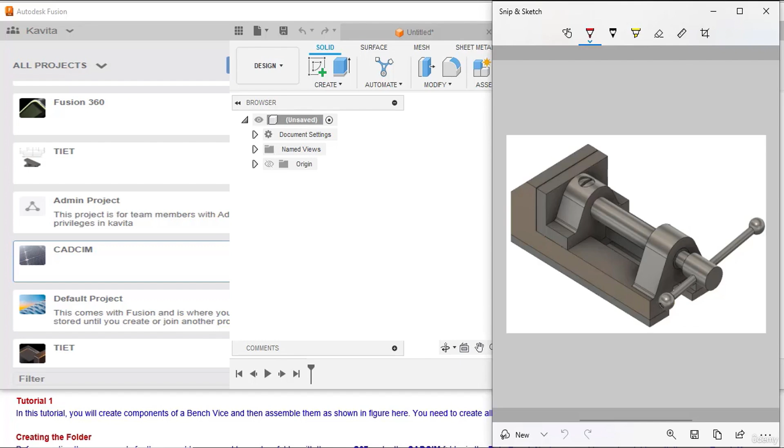Hello everyone, in this tutorial you will create components of a bench vise and then assemble them as shown in figure here. You need to create all the components as separate files.

Creating the folder. Before creating the components for the assembly, you need to create a folder with the name C07 under the CADCIM folder in the data panel. Next, you need to create a folder with the name bench vise assembly under the C07 folder.

Double click on CADCIM folder in the data panel and choose the new folder button. Double click here, then click on the new folder button. New folder is created here. Then press enter key.

Rename new folder to C07. Right click here. A shortcut menu is displayed here. Choose rename option from the shortcut menu and enter C07. Then press enter key.

Similarly, create a folder with the name bench vise assembly under C07 folder. Double click here and then click on new folder button and rename this folder as bench vise assembly. And press enter key.

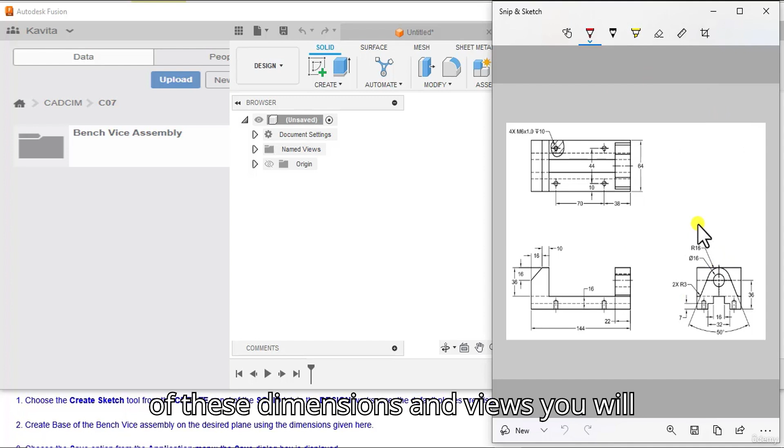Create base of the bench vise assembly on the desired plane using the dimensions given here. With the help of these dimensions and views, you will create the base of the bench vise assembly. But here you can see that I have already created base of the bench vise assembly by using the sketching and part modeling tools.

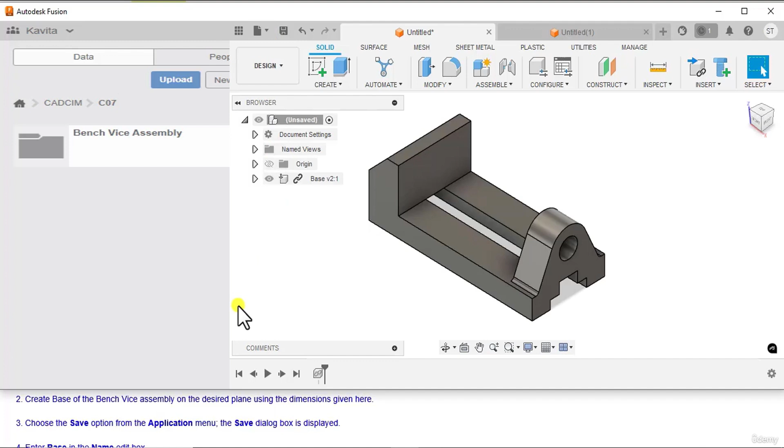Choose the Save option from the application menu. The Save dialog box is displayed. Click here, then choose Save option. Enter base in the name edit box.

Click on the down arrow on the extreme right side of the location selection box. The Save dialog box gets expanded. Click here. Choose the CADCIM option from the project area. Next, choose the bench vise assembly from the CADCIM C07 area.

Choose the CADCIM project from the project column. Now, choose bench vise assembly from CADCIM C07 area. Choose the Save button to save the model and exit the Save dialog box. Click on the Save button.

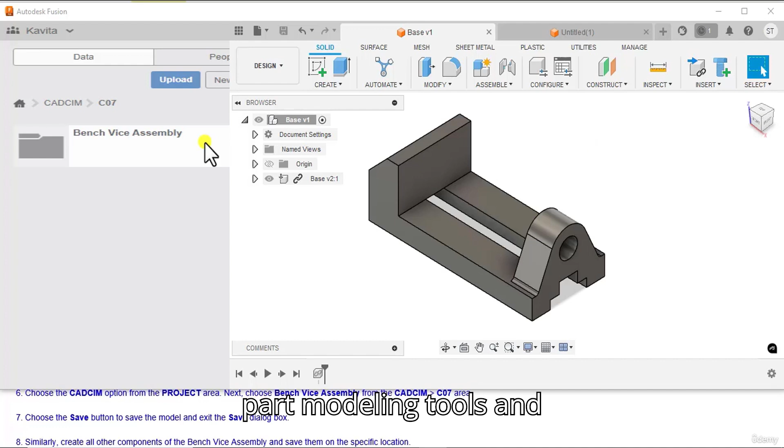Similarly, create all the components of the bench vise assembly and save them on specific location. You have to create all the components with the help of sketching and part modeling tools and save them in the bench vise assembly folder. Here you can see that I have created all the components with the help of sketching and part modeling tools and saved them in bench vise assembly folder.

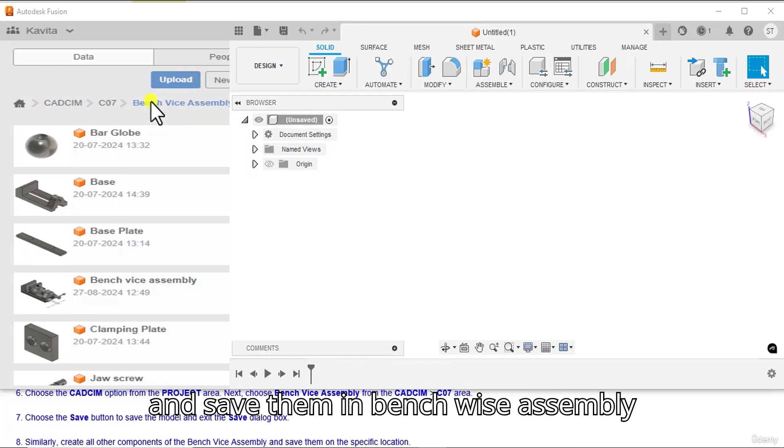Inserting components in assembly design. Choose the Show Data Panel button from the application bar if the data panel is not displayed by default. But here you can see that data panel is displayed by default, so you can skip this step. Double click on the bench vise assembly folder in the data panel. The bench vise assembly folder is opened. Double click on the bench vise assembly.

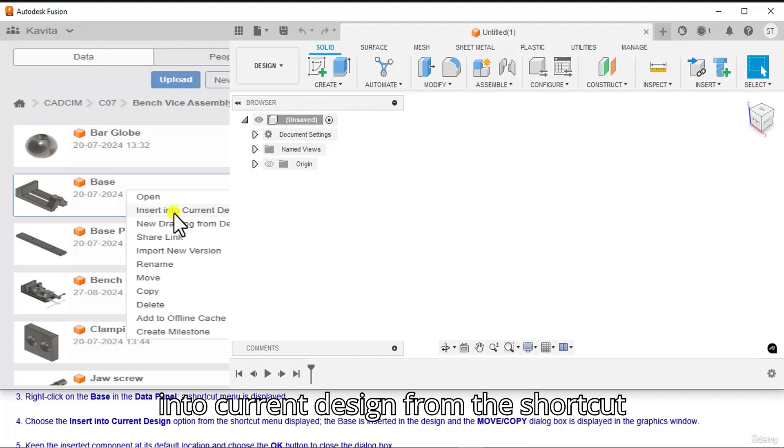Right click on the base in the data panel, a shortcut menu is displayed. Right click here. Choose the Insert into Current Design option from the shortcut menu displayed. The base is inserted in the design and the Move or Copy dialog box is displayed in the graphics window. Choose the Insert into Current Design from the shortcut menu. The base is inserted in the design and Move or Copy dialog box is displayed here.

Keep the inserted component at its default location and choose the OK button to close the dialog box. Click on the OK button.

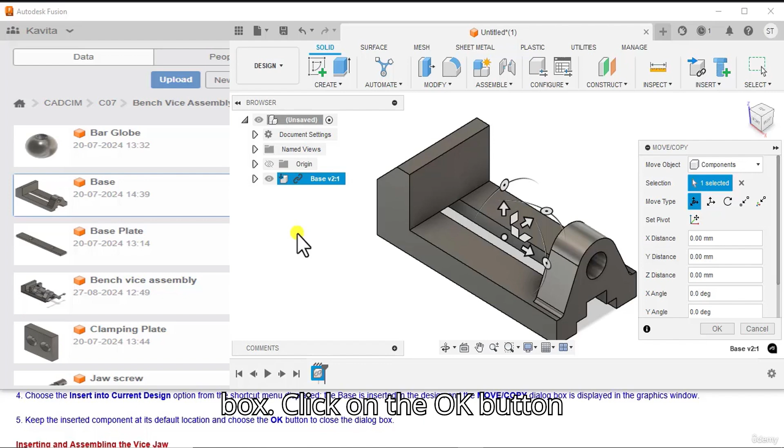Inserting and assembling the vise jaw. Next, you need to insert the vise jaw in the assembly design. Right click on the vise jaw in the data panel and choose the Insert into Current Design option from the shortcut menu displayed. The selected component is inserted in the assembly design and the Move or Copy dialog box is displayed along with the inserted component. Right click here, then choose Insert into Current Design option from the shortcut menu.

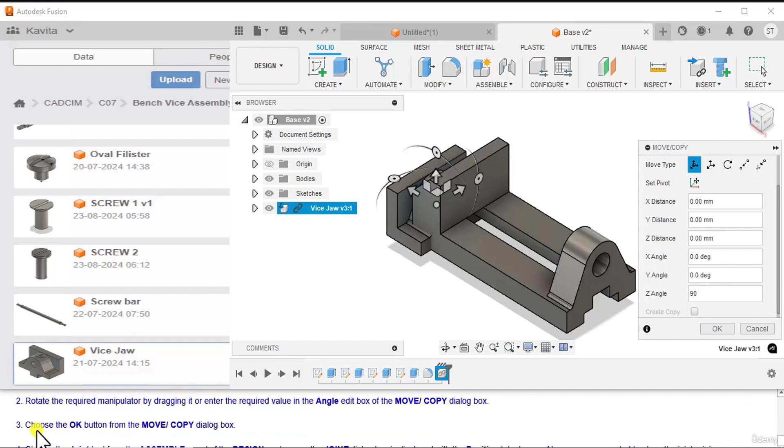Rotate the required manipulator by dragging it or enter the required value in the angle edit box of the Move or Copy dialog box. Enter 90 in the Z angle edit box. Choose the OK button from the Move or Copy dialog box. Click on the OK button.

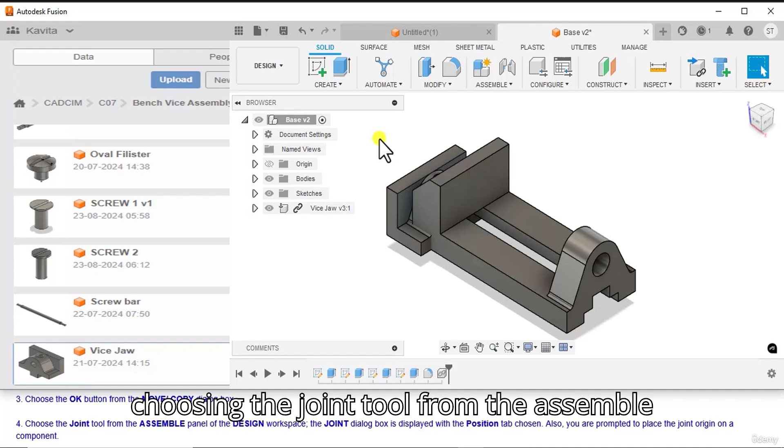Choose the Joint tool from the Assemble panel of the Design workspace. The Joint dialog box is displayed with the Position tab chosen. Also, you are prompted to place the joint origin on a component. Before choosing the Joint tool from the Assemble panel, you have to right click here, then choose the Unground from Parent option from the shortcut menu. Click here, then choose the Joint tool from the Assemble panel.

Choose the Simple button from the Origin Mode area under the Component 1 node. Choose the Simple button from the Origin Mode area. Next, select the location on the Vice Jaw where you want to place the joint origin. On doing so, the Select button gets activated in the Snap area under the Component 2 node. Rotate the assembly with the help of the ViewCube. Then select this face.

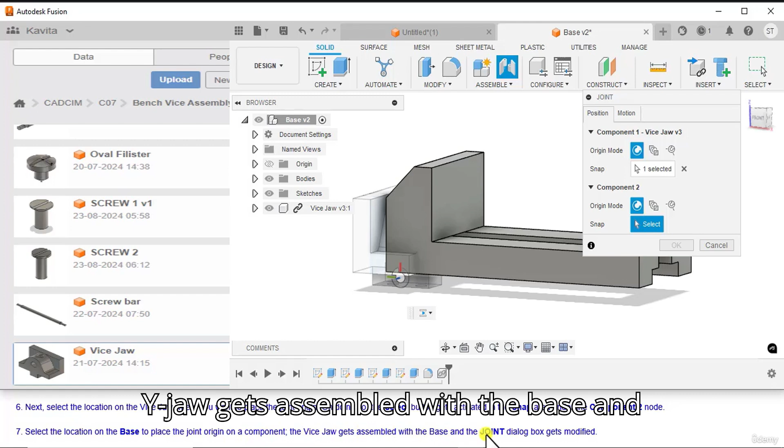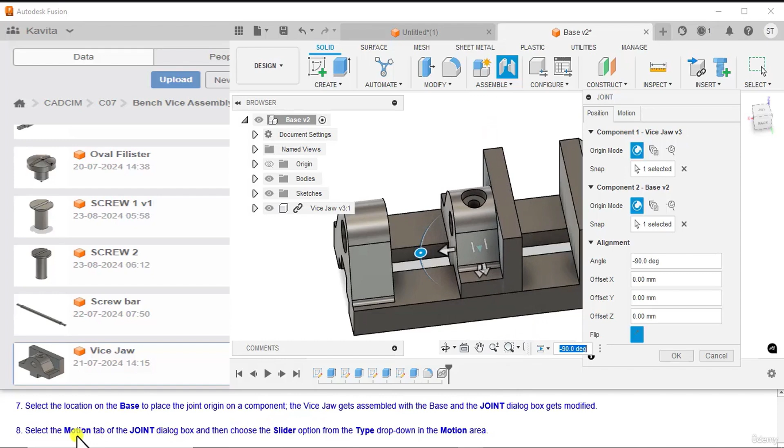Select the location on the base to place the joint origin on a component. The Vice Jaw gets assembled with the base and the Joint dialog box gets modified. Again, rotate the assembly with the help of the ViewCube and then click here. Select the Motion tab of the Joint dialog box and then choose the Slider option from the Type drop-down in the Motion area. Select the Motion tab and then choose the Slider option from the Type drop-down.

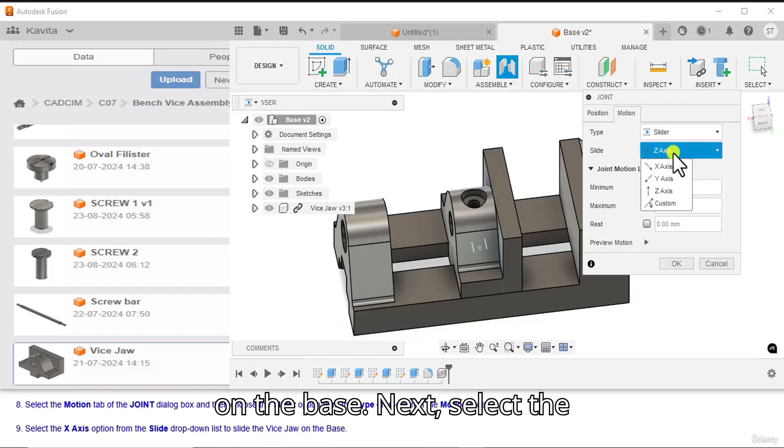Select the X-axis option from the Slide drop-down list to slide the Vice Jaw on the base. Next, select the X-axis option from the Slide drop-down list. Choose the OK button from this dialog box. Now click on the OK button. Click on the Home button to get the isometric view of the assembly. Now you can see that the Vice Jaw gets assembled with the base.

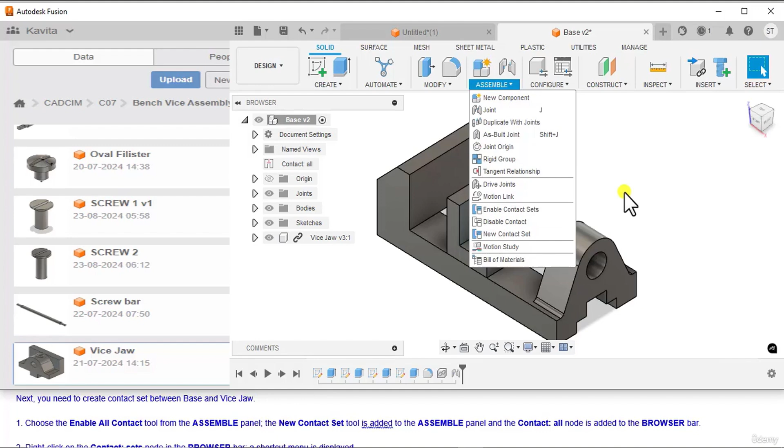Creating contact set. Next, you need to create a contact set between the base and the Vice Jaw. Choose the Enable All Contact tool from the Assemble panel. The new contact set tool is added to the Assemble panel and the Contact All node is added to the browser bar. Click here, then choose the Enable All Contact tool from the Assemble panel. A new contact set is added here and the Contact All node is added to the browser bar.

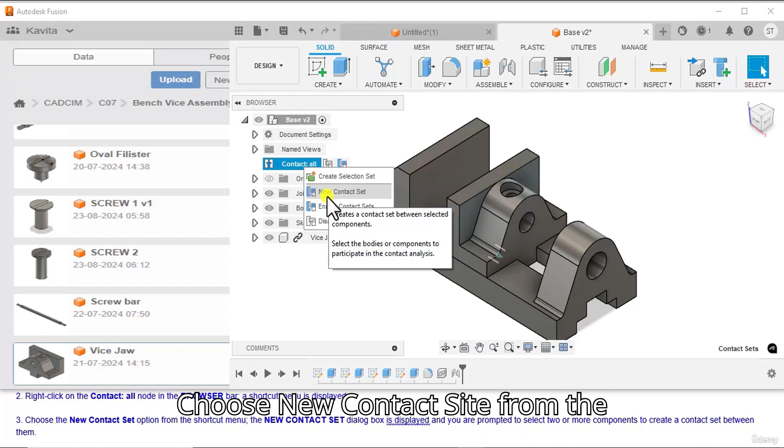Right click on the Contact All node in the browser bar. A shortcut menu is displayed. Right click here. Choose the New Contact Set option from the shortcut menu. The New Contact Set dialog box is displayed and you are prompted to select two or more components to create a contact set between them. Choose New Contact Set from the shortcut menu. The New Contact Set dialog box is displayed here.

Select base and vice jaw from the graphics window to create a contact between them. Choose base and vice jaw from the browser bar. Choose the OK button in the New Contact Set dialog box; the contact is applied between the components. Choose the OK button. The contact is applied between the selected components.

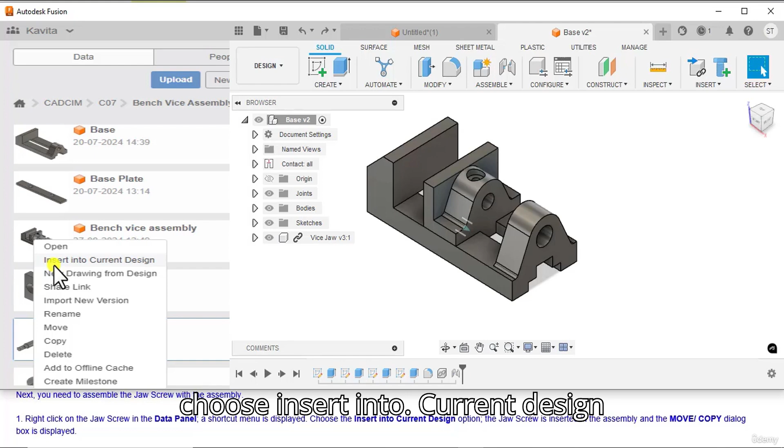Next, assembling the jaw screw. Next, you need to assemble the jaw screw with the assembly. Right click on the jaw screw in the data panel; a shortcut menu is displayed. Choose the Insert into Current Design option. The jaw screw is inserted in the assembly and the Move or Copy dialog box is displayed. Right click here. Then choose the Insert into Current Design option from the shortcut menu.

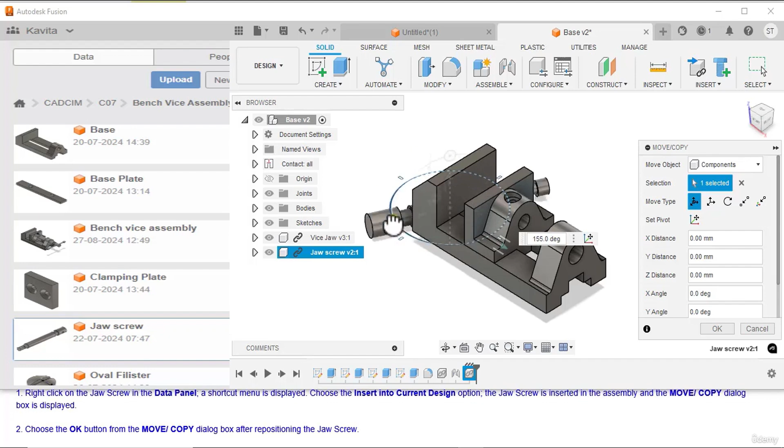Choose the OK button from the Move or Copy dialog box after repositioning the jaw screw. Reposition the jaw screw with the help of the manipulator. Then choose OK from the marking menu. Choose the Joint tool from the Assemble panel of the Design workspace. The Joint dialog box is displayed. Also, you are prompted to place the joint origin on a component. Click here, then choose the Joint tool from the Assemble panel.

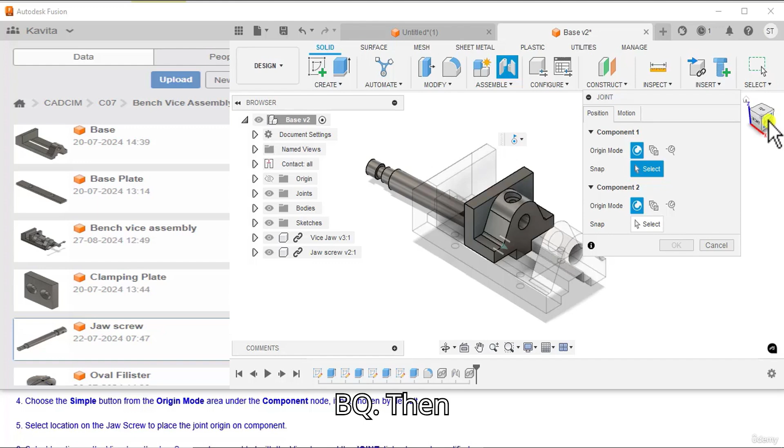Choose the Simple button from the Origin Mode area under the Component node if not chosen by default. Choose the Simple button from the Origin Mode area. Select a location on the jaw screw to place the joint origin on a component. Rotate the assembly with the help of the ViewCube. Then click here. Select a location on the vice jaw. The jaw screw gets assembled with the vice jaw and the Joint dialog box gets modified. Now click here.

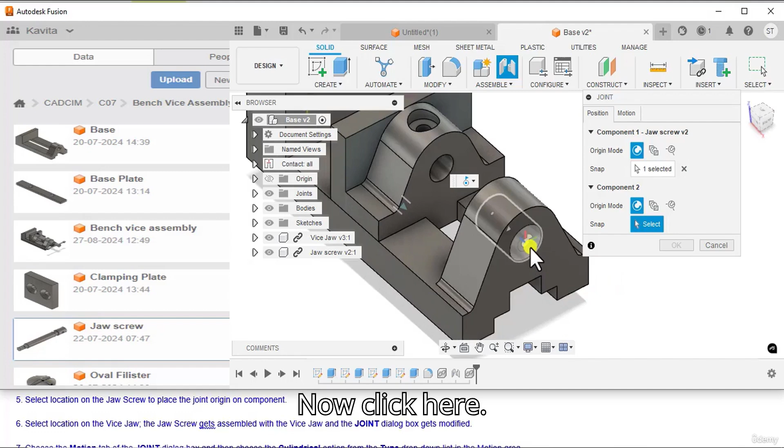Choose the Motion tab of the Joint dialog box and then choose the Cylindrical option from the Type drop-down list in the Motion area. Choose the Motion tab and then choose the Cylindrical option from the Type drop-down list.

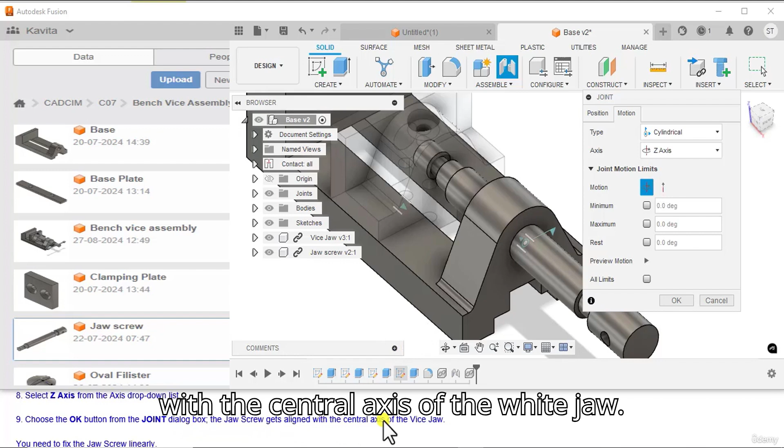Select Z-axis from the Axis drop-down list. Select the Z-axis from the Axis drop-down list. Choose the OK button from the Joint dialog box. The jaw screw gets aligned with the central axis of the vice jaw. Click on the OK button. Now you can see that jaw screw gets aligned with the central axis of the vice jaw.

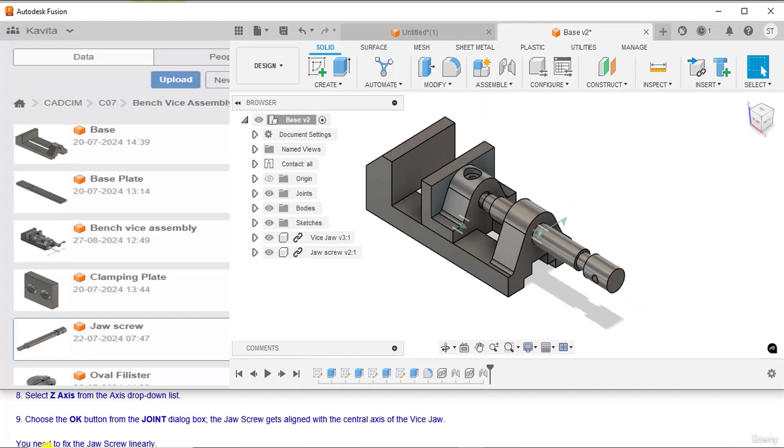Click on the Home button to get the isometric view of the assembly. You need to fix the jaw screw linearly. Invoke the Joint dialog box and choose the Simple button from the Origin Mode area. Next, select the face of the jaw screw. You are prompted to place a joint origin on the component.

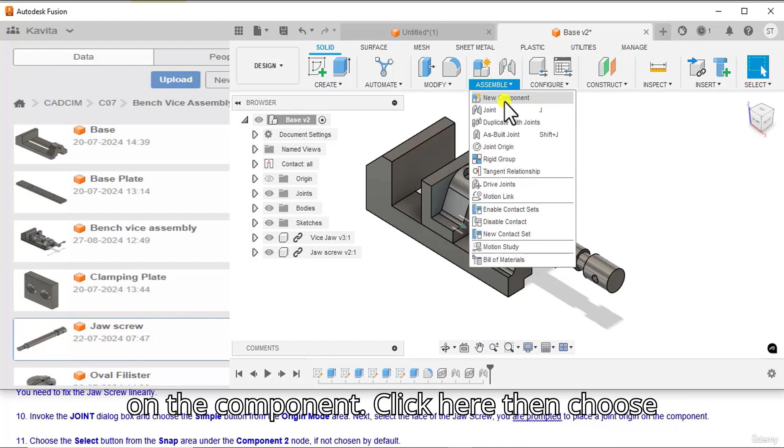Click here, then choose Joint option from the Assemble panel. Next, select Simple button from the Origin Mode area. Now rotate the assembly with the help of the ViewCube. Then click here. Choose the Select button from the Snap area under the Component 2 node if not chosen by default. Choose the Select button from the Snap area.

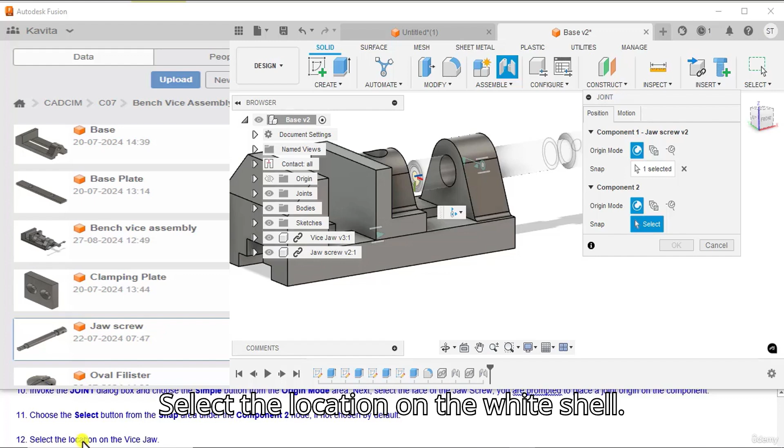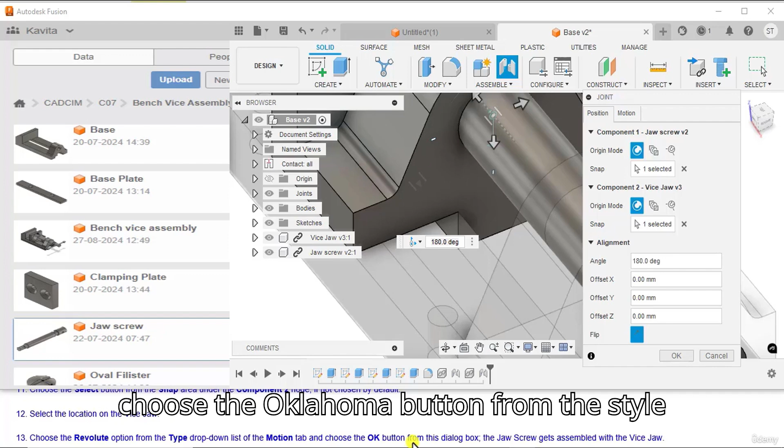Select the location on the vice jaw. Rotate the assembly with the help of the ViewCube and then click here. Choose the revolute option from the type drop-down list of the motion tab and choose the OK button from this dialog box. The jaw screw gets assembled with the vice jaw.

Click here, then choose revolute option from the type drop-down list. Now click on the OK button. Choose the home button from the graphics window. Now you can see that jaw screw gets assembled with the vice jaw.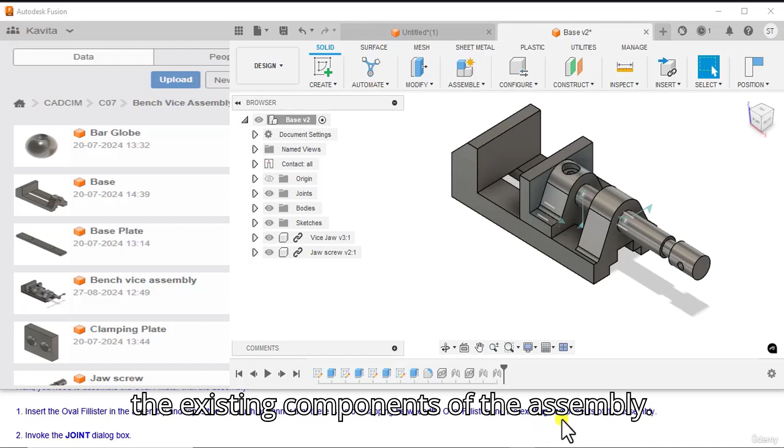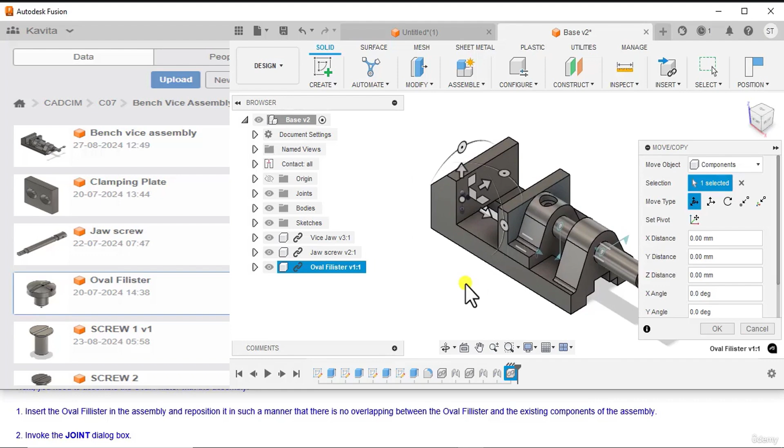Assembling the oval fillister. Next, you need to assemble the oval fillister with the assembly. Insert the oval fillister in the assembly and reposition it in such a manner that there is no overlapping between the oval fillister and the existing components of the assembly. Right click here, then choose Insert into Current Design from the shortcut menu displayed. Drag the oval fillister with the help of manipulator. Then choose OK button from the Move or Copy dialog box.

Invoke the Joint dialog box. Click here, then choose Joint tool from the Assemble panel. Select the edge of the oval fillister as component 1 and the inner edge of the vice jaw as component 2. Rotate the assembly with the help of ViewCube. Then select this edge of oval fillister. Again click on the home button to get the isometric view of the assembly. Now select this edge of vice jaw.

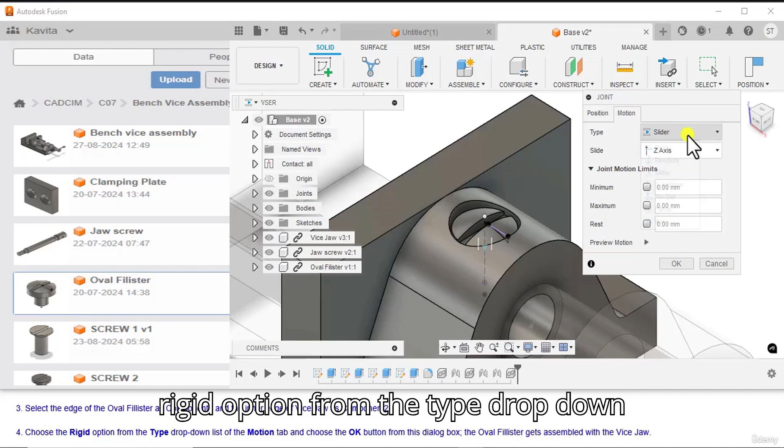Choose the rigid option from the type drop-down list of the motion tab and choose the OK button from the dialog box. The oval fillister gets assembled with the vice jaw. Click here and then choose rigid option from the type drop-down list. Now choose the OK button. The oval fillister gets assembled with the vice jaw.

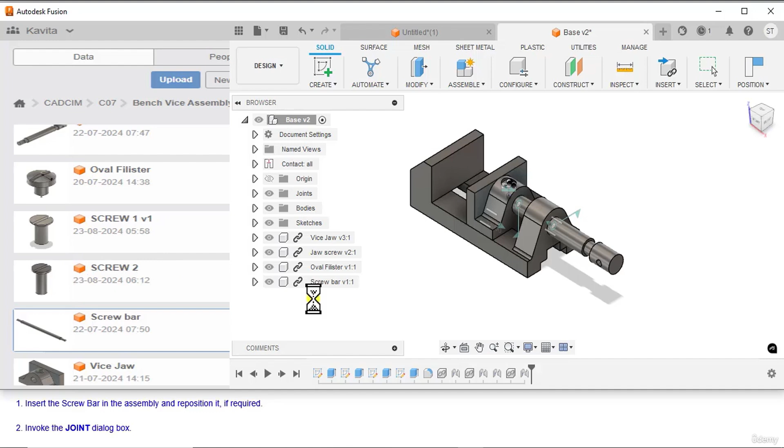Assembling the screw bar and bar globes. Insert the screw bar in the assembly and reposition it if required. Right click here, then choose Insert into Current Design option from the shortcut menu displayed. Reposition the screw bar with the help of manipulator. Now choose the OK button from the Move or Copy dialog box.

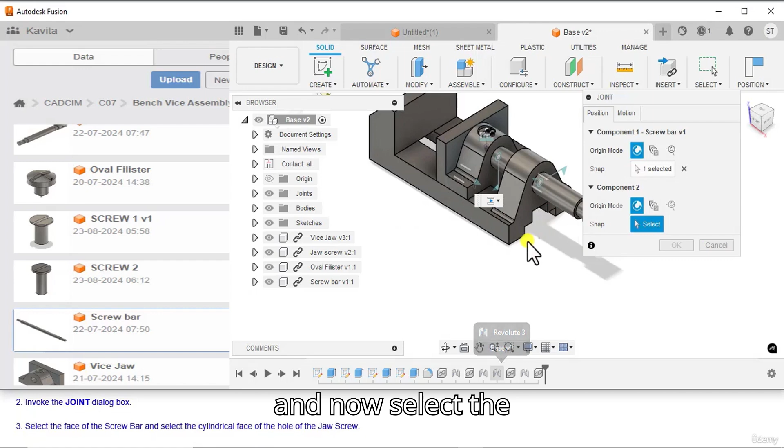Invoke the Joint dialog box. Click here, then choose Joint tool from the Assemble panel. Select the face of the screw bar and select the cylindrical face of the hole of the jaw screw. Select the face of the screw bar and now select the cylindrical face of the hole of jaw screw. Choose the slider option from the type drop-down list of the motion tab. Click on the motion tab and then make sure that slider option is selected in the type drop-down list.

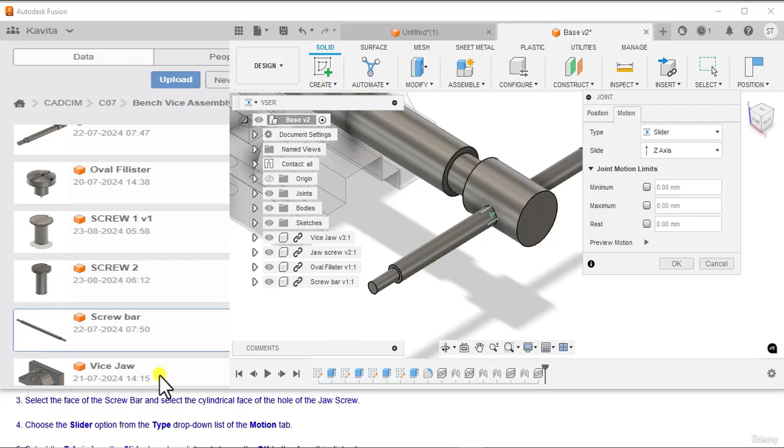Select the Z axis from the slide drop-down list and choose the OK button from this dialog box. Make sure that Z axis is selected in the slide drop-down list. Now click on the OK button.

Insert two instances of bar globes in the assembly design from the data panel and reposition them so that their planar surface is toward the screw bar where it will be assembled. Right click here, then choose Insert into Current Design. Now reposition it with the help of manipulator.

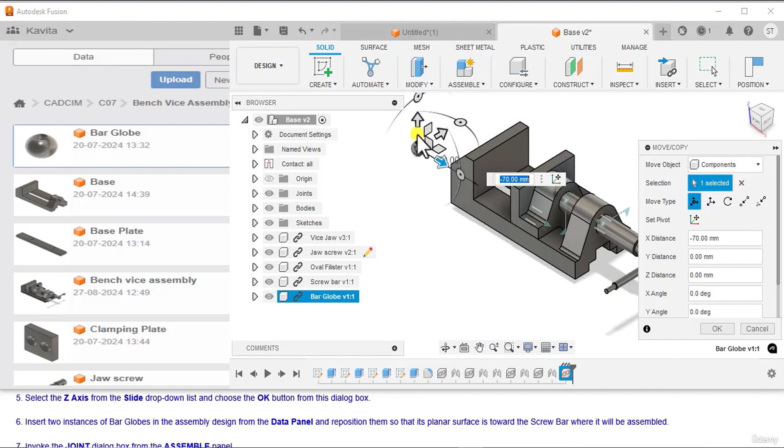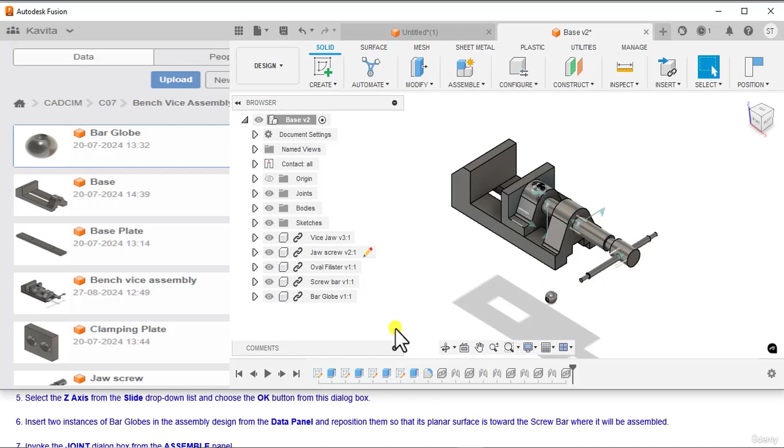Right click here, then choose OK from the marking menu. Move it to here. Again right click here, then choose Insert into Current Design. Reposition the bar globe with the help of manipulator.

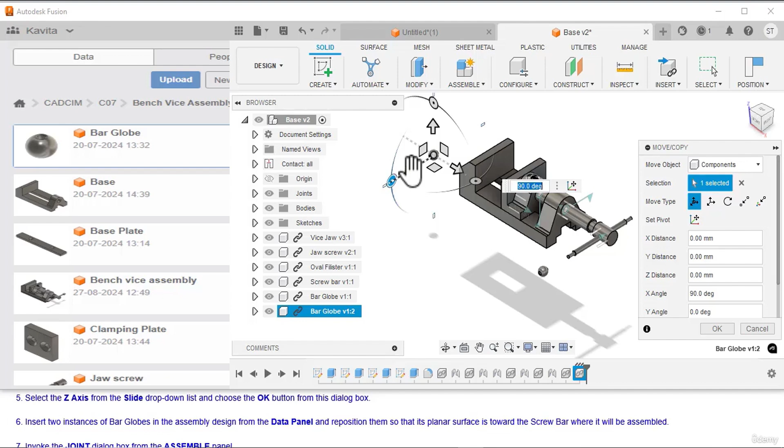Right click here, then choose OK from the marking menu. Move the bar globe to this place in the graphics window. Click on the bar globe and move here.

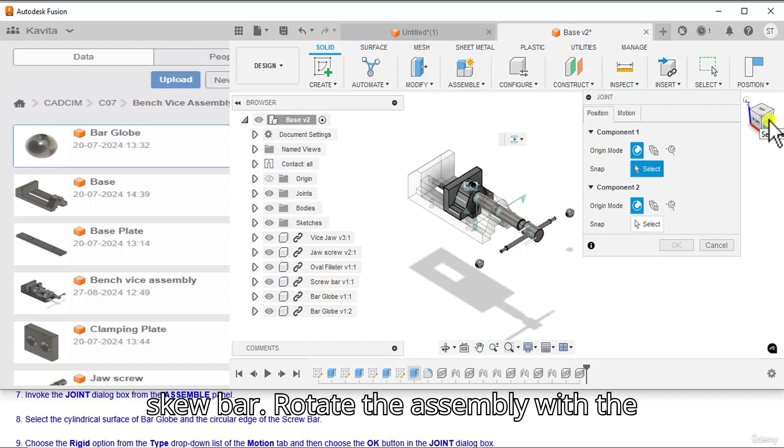Invoke the joint dialog box from the assemble panel. Click here, then choose joint tool from the assemble panel. Select the cylindrical surface of bar globe and circular edge of the screw bar. Rotate the assembly with the help of ViewCube. Then select this face of bar globe.

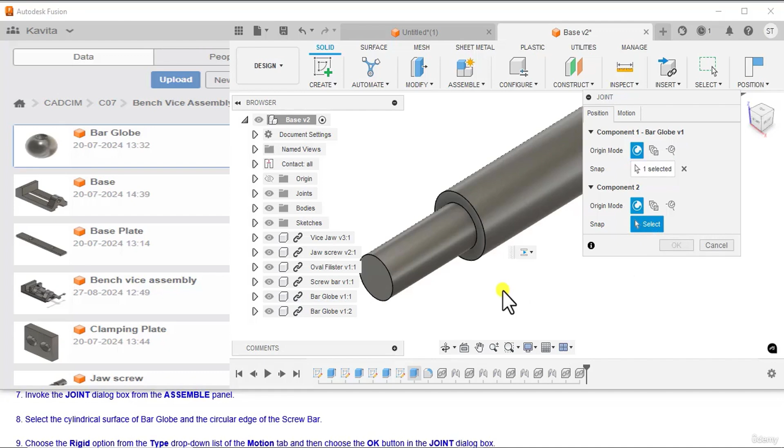Now click on the home button. Now click on select button in the snap area. Then choose this edge of the screw bar.

Choose the rigid option from the type drop down list of the motion tab and then choose the OK button in the dialog box. Click on the motion tab, then select rigid option from the type drop down list and now click on the OK button.

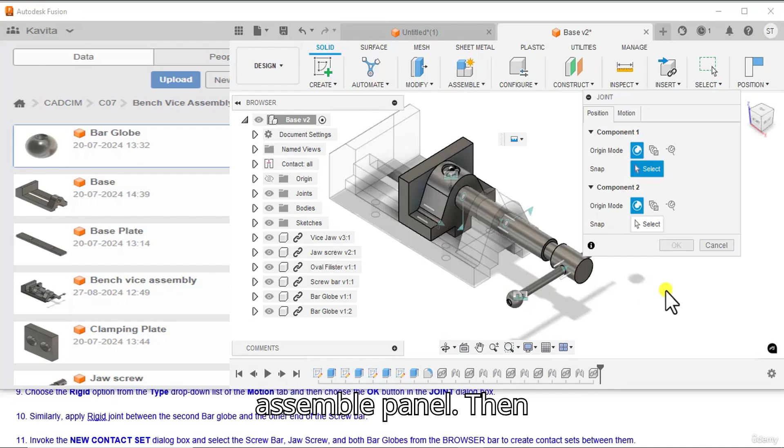Similarly, apply the rigid joint between the second bar globe and the other end of the screw bar. Click here, then choose joint tool from the assemble panel. Then select this face. Now rotate the assembly with the help of ViewCube.

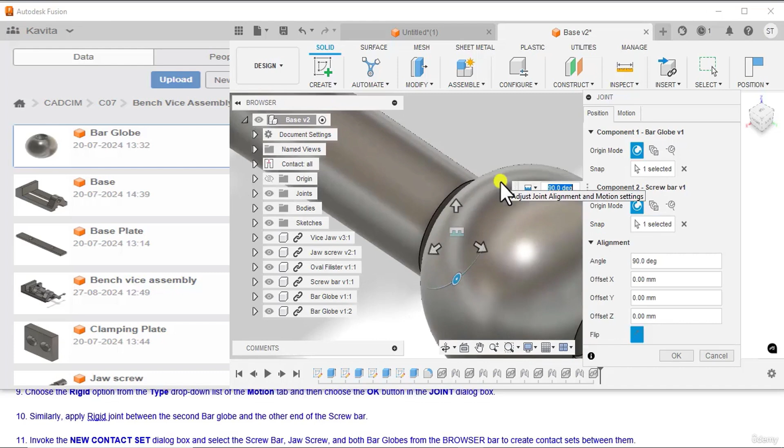Click on the select button in the snap area and then select this edge. Now click on the motion tab and make sure that rigid option is selected in the type drop down list. Click on the OK button. Now choose the home button from the graphics window to get the isometric view of the assembly.

Invoke the New Contact Set dialog box and select the screw bar, jaw screw and both bar globes from the browser bar to create contact sets between them. Click here, then choose New Contact Set option from the assemble panel. New Contact Set dialog box is displayed. Then select screw bar, jaw screw and both bar globes from the browser bar. Choose the OK button from the dialog box. Click on the OK button.

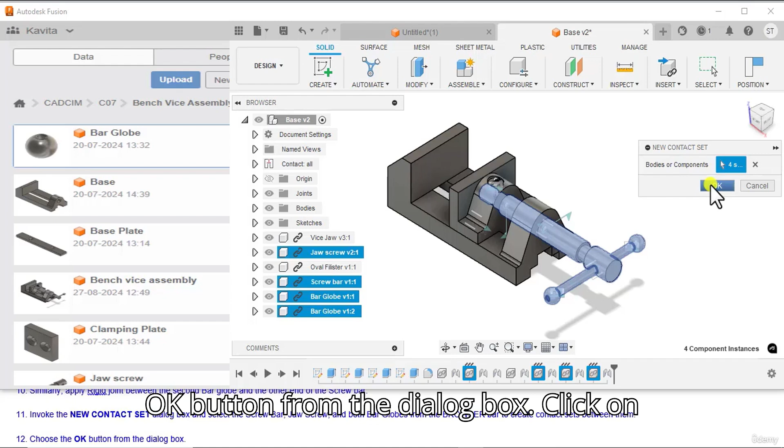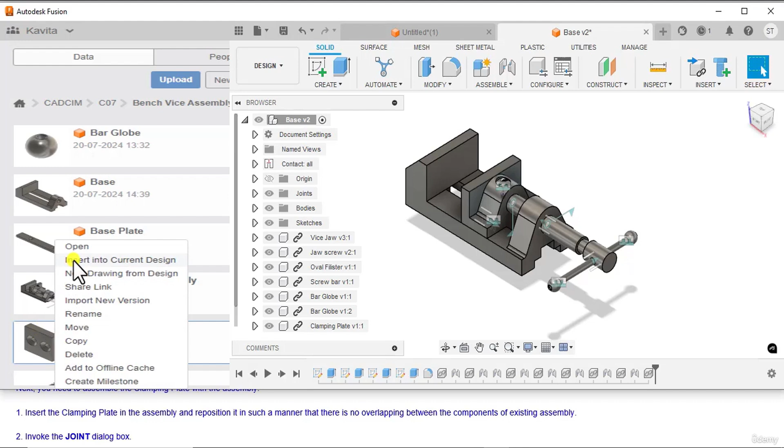Assembling the clamping plate. Next, you need to assemble the clamping plate with the assembly. Insert the clamping plate in the assembly and reposition it in such a manner that there is no overlapping between the components of existing assembly. Right click here, then choose Insert into Current Design. Now with the help of manipulator, you have to reposition the clamping plate. Now click on the OK button.

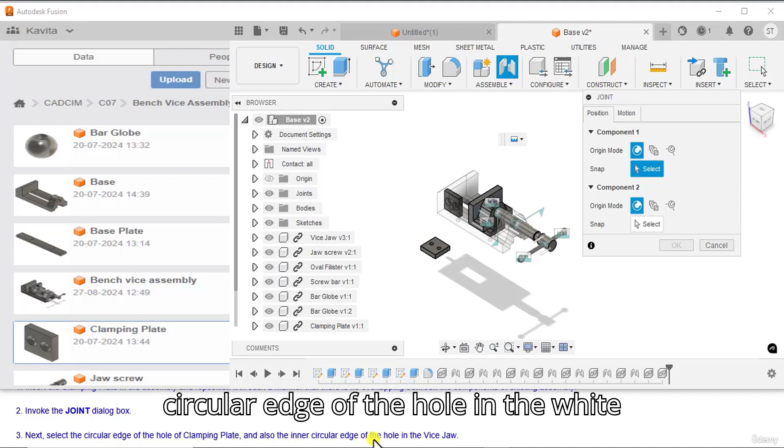Invoke the joint dialog box. Click here, then choose joint tool from the assemble panel. Next, select the circular edge of the hole of clamping plate and also the inner circular edge of the hole in the vice jaw. Select the circular edge of hole of clamping plate. Now rotate the assembly with the help of the ViewCube and then select inner circular edge of the hole in the vice jaw.

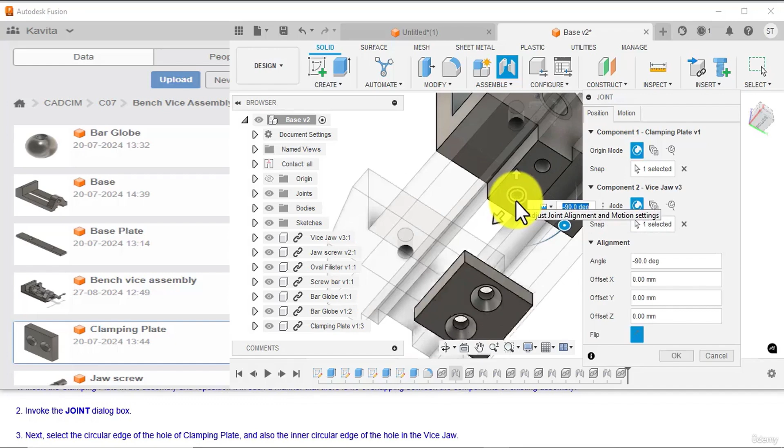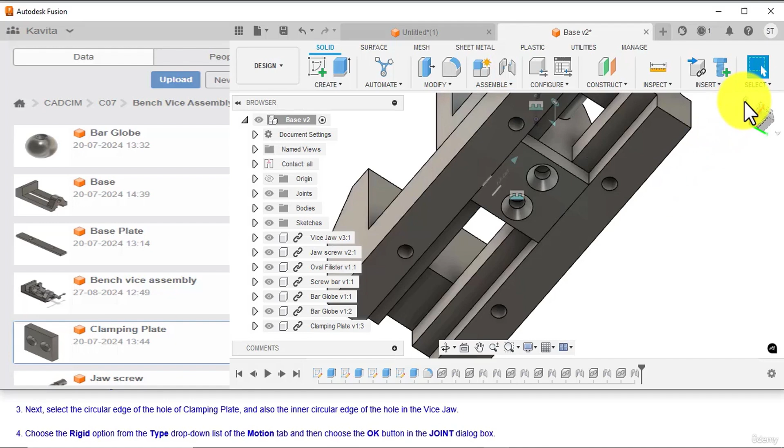Choose the rigid option from the type drop down list of the motion tab and then choose the OK button in the dialog box. Click on the motion tab and make sure that rigid option is selected in the type drop down list. Now click on the OK button. Choose the home button from the graphics window to get the isometric view of the assembly.

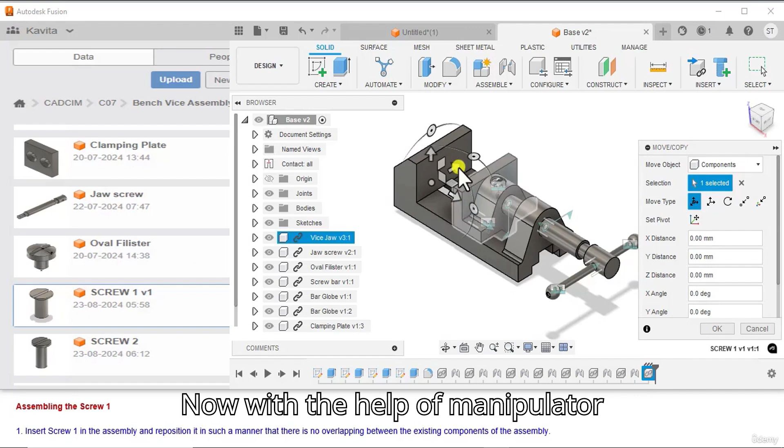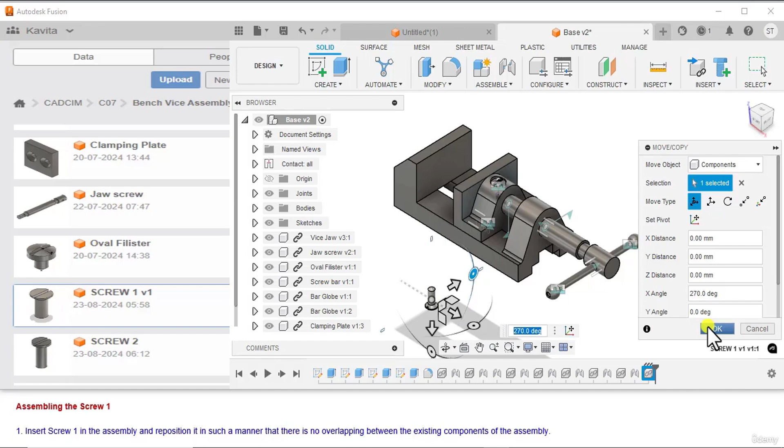Assembling the screw 1. Insert screw 1 in the assembly and reposition it in such a manner that there is no overlapping between the existing components of the assembly. Right click here, then choose Insert into Current Design from the shortcut menu. Now with the help of manipulator, you have to reposition the screw 1. Now click on OK button in the Move/Copy dialog box.

Choose the joint tool from the assemble panel. The joint dialog box is displayed. Click here, then choose joint tool from the assemble panel. Select the circular edge of screw 1 and circular edge of hole of clamping plate by rotating the assembly using ViewCube. Select this edge of screw 1. Now rotate the assembly with the help of ViewCube and select this edge of clamping plate.

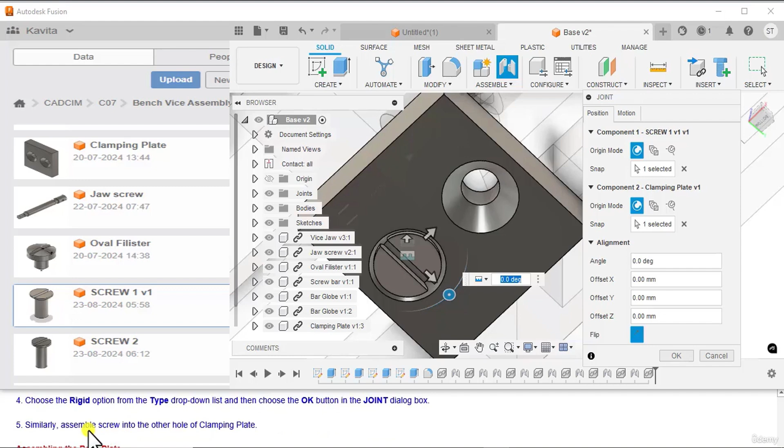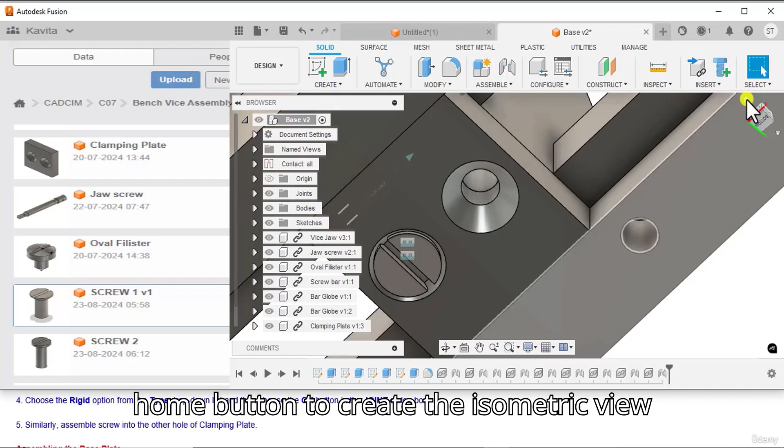Choose the rigid option from the type drop down list and then choose the OK button from the joint dialog box. Click on motion tab and then make sure that rigid option is selected in the type drop down list. Click on the OK button. Click on the home button to get the isometric view of the assembly.

Similarly, assemble screw into other hole of clamping plate. Similarly, you have to assemble another screw into the other hole of clamping plate. Again right click here, then choose Insert into Current Design.

Reposition the screw with the help of the manipulator, then click on the OK button in the Move or Copy dialog box.

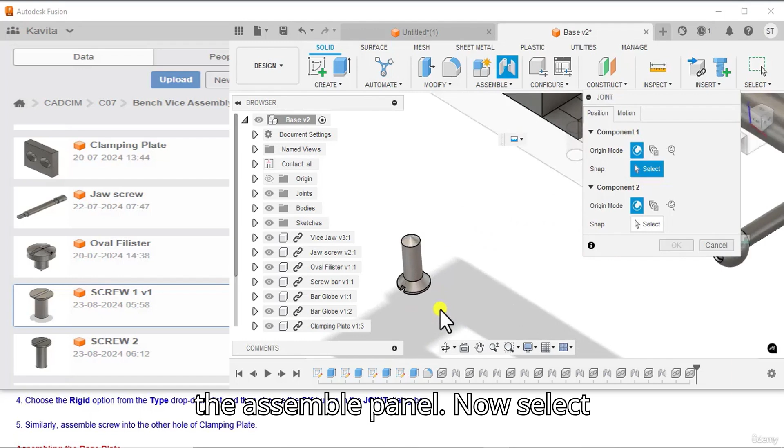Choose the Joint tool from the Assemble panel, then select this edge of the screw. Rotate the assembly with the help of the ViewCube, then select this edge of the hole of the clamping plate.

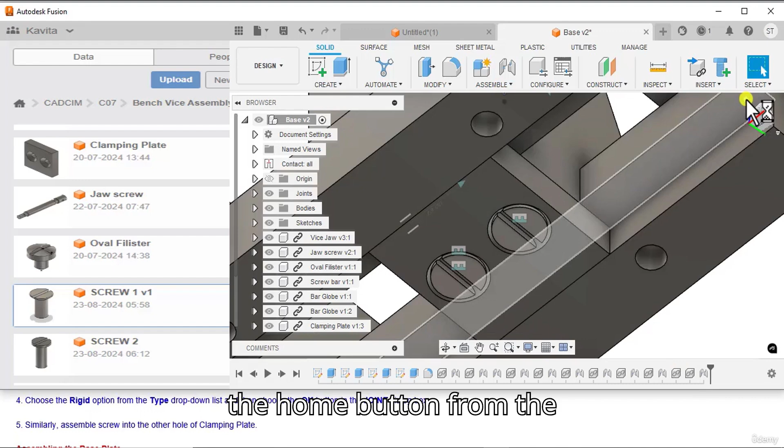Click on the OK button, then choose the Home button from the graphics window to get the isometric view of the assembly.

Assembling the base plate. Now assemble the base plate with the base. Insert the base plate in the assembly and reposition it. Right click here, then choose Insert into Current Design.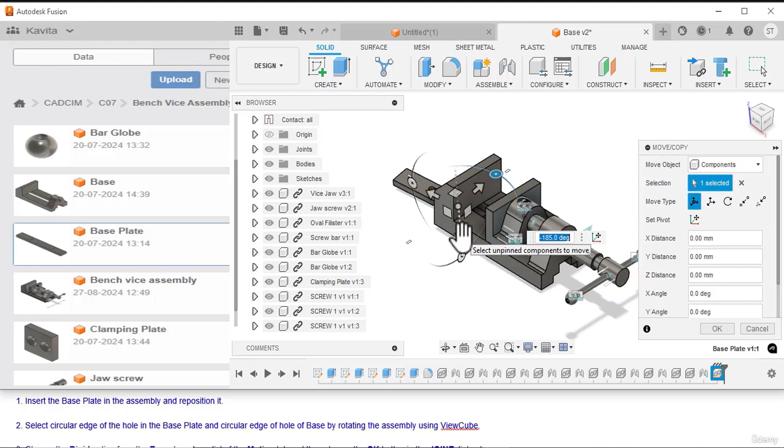Reposition the base plate with the help of the manipulator, then click on the OK button from the Move or Copy dialog box.

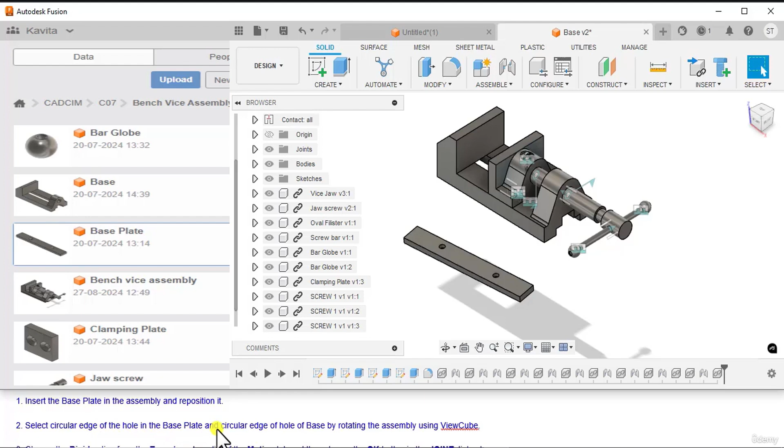Select the circular edge of the hole in the base plate and the circular edge of the hole of the base by rotating the assembly using the ViewCube. Choose the Joint tool from the Assemble panel, then select the circular edge of the hole of the base plate, then select the circular edge of the hole of the base.

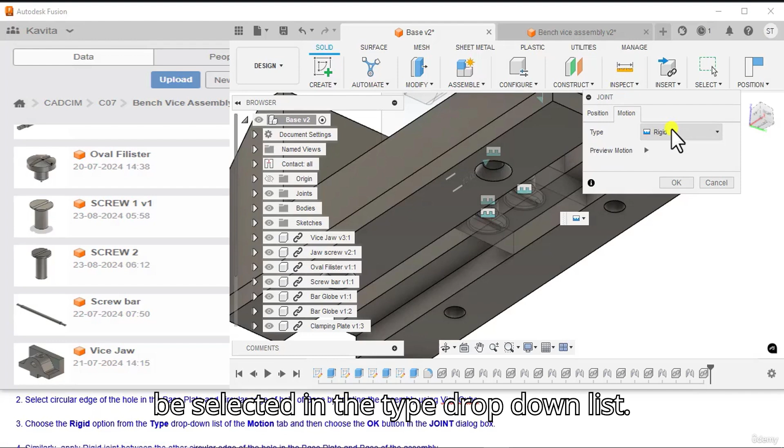Choose the rigid option from the type drop-down list of the motion tab and then choose the OK button in the Joint dialog box. Click on the motion tab, make sure rigid is selected in the type drop-down list, then click OK.

Choose the Home button from the graphics window to get the isometric view of the model.

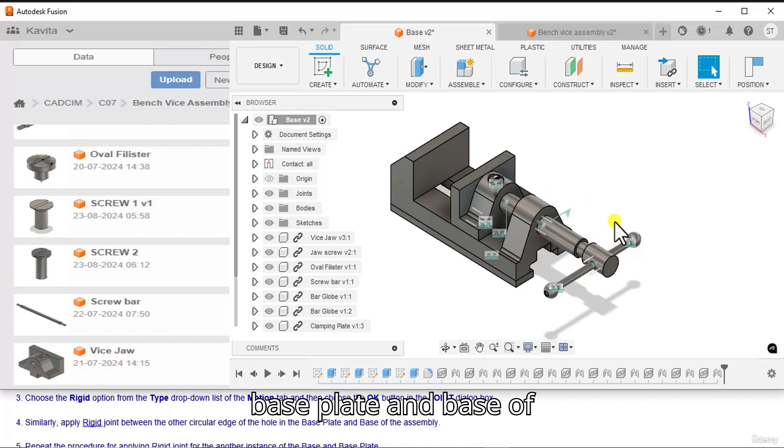Similarly, apply a rigid joint between the other circular edge of the hole in the base plate and the base of the assembly. Repeat the procedure for applying the rigid joint for the other instance of the base and base plate. Here you can see the base plate assembled with the base of the assembly.

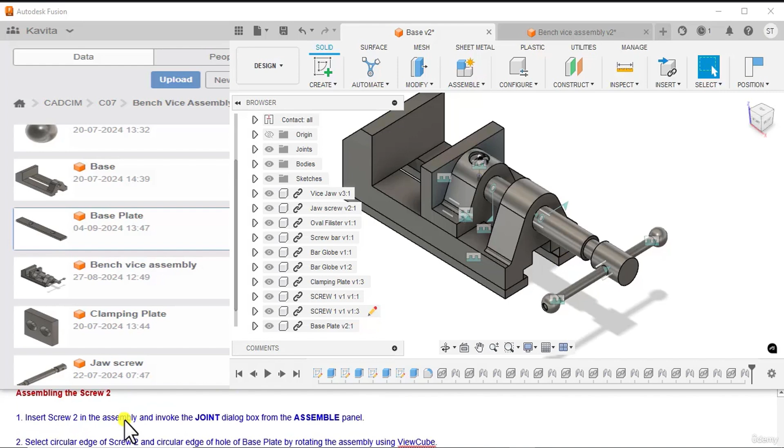Assembling screw 2. Insert screw 2 in the assembly and invoke the Joint dialog box from the Assemble panel. Click here, then choose Insert into Current Design from the shortcut menu displayed.

Reposition screw 2 with the help of the manipulator, then choose the OK button from the Move or Copy dialog box.

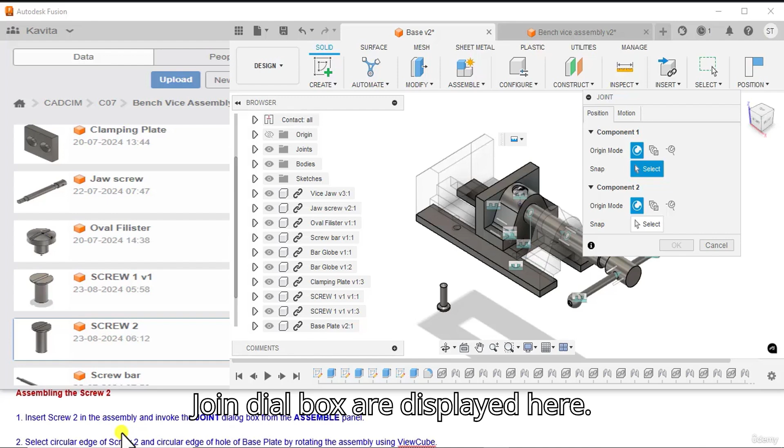Click on the Assemble tab, then choose the Joint tool from the Assemble panel. The Joint dialog box is displayed. Select the circular edge of screw 2 and the circular edge of the hole of the base plate by rotating the assembly using the ViewCube.

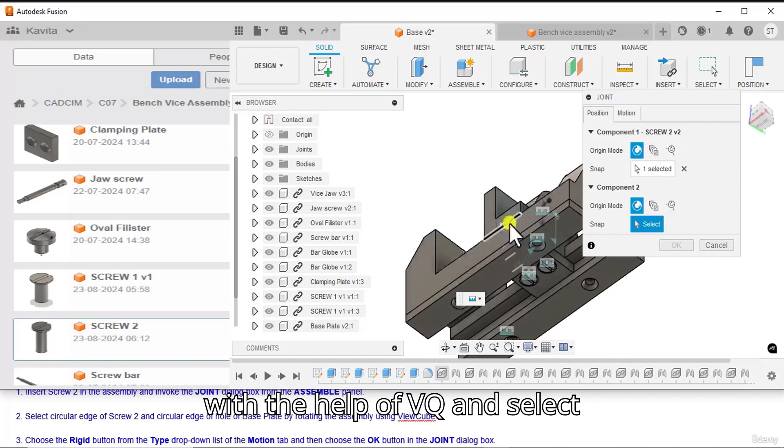Select the circular edge of screw 2, then rotate the assembly with the help of the ViewCube and select the circular edge of the hole of the base plate.

Choose the rigid button from the type drop-down list of the motion tab and then choose the OK button in the Joint dialog box.

Now click on the Home button to get the isometric view of the assembly.

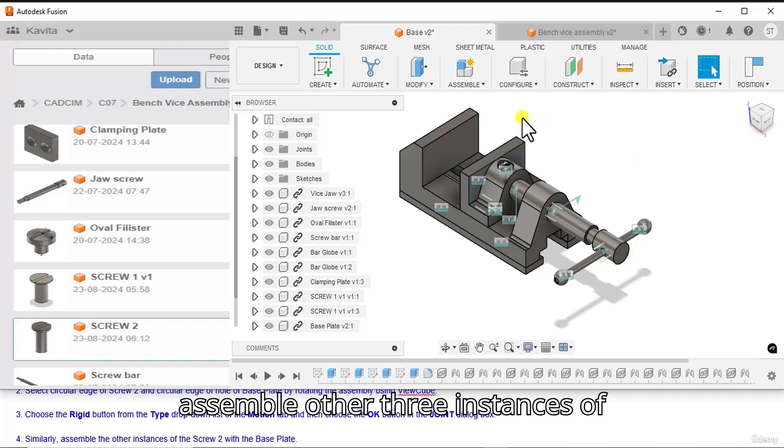Similarly, assemble the other instances of screw 2 with the base plate, repeating for the other 3 instances. Here you can see that after assembling all the components of the bench vise assembly, the assembly will look like this.

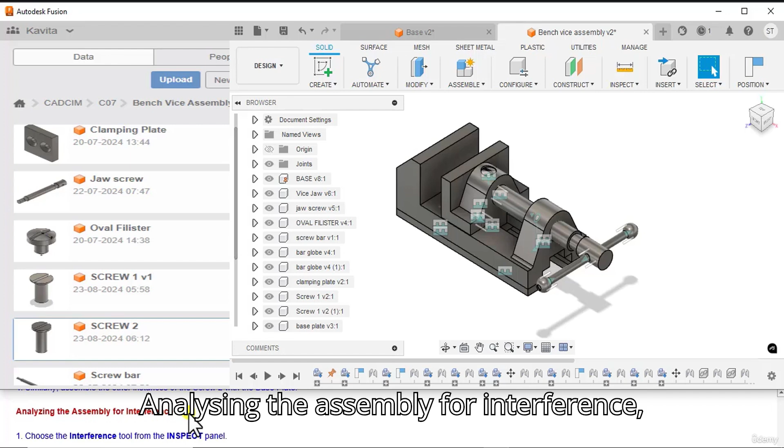Analyzing the assembly for interference. Choose the Interference tool from the Inspect panel.

Here you will get a message asking whether you want to capture the current position of the moved component or revert components to their previous position. Click on Capture Position.

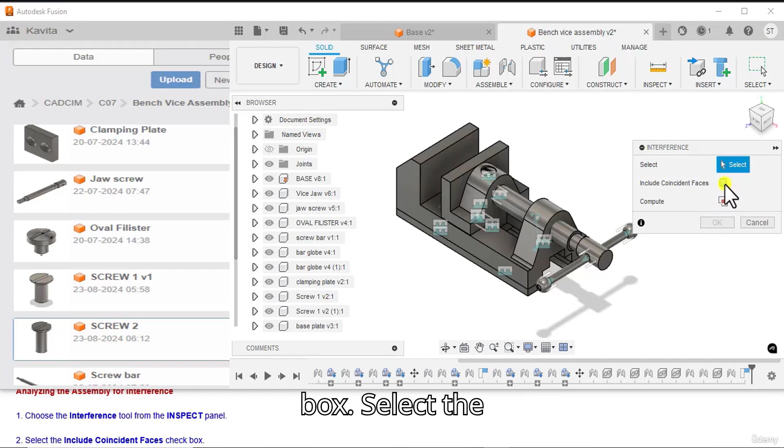Now you can see the Interference dialog box is displayed. Select the Include Coincident Faces checkbox from the Interference dialog box.

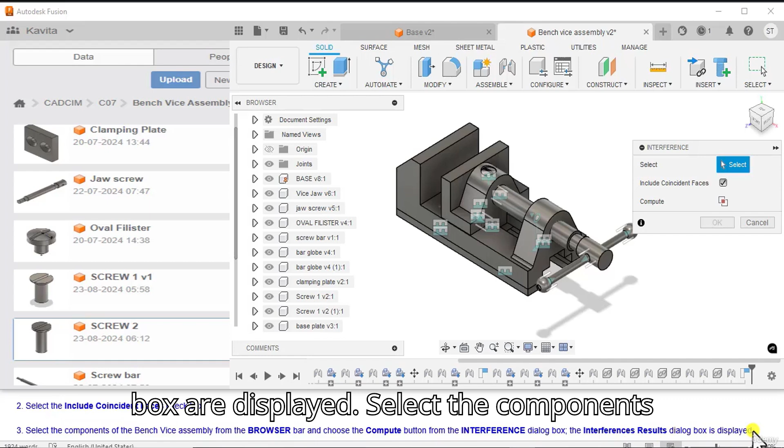Select the components of the bench vise assembly from the browser bar and choose the Compute button from the Interference dialog box. The Interference Results dialog box is displayed. Select the components of the bench vise assembly by pressing the Ctrl key from the browser bar.

Now click on the Compute button. The Interference Result dialog box is displayed here, showing the interference of the components in the assembly. Now click on the OK button.

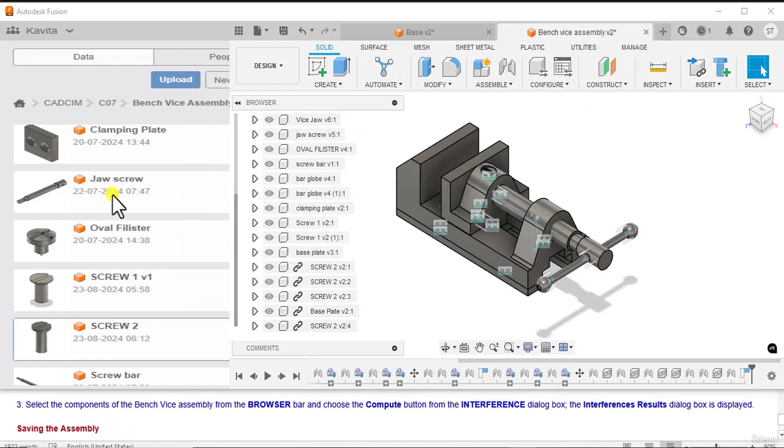Saving the assembly. Next you need to save the assembly. Choose the Save option from the File menu or Application menu.

The Save dialog box is displayed. Click here, then choose Save option from the File menu. The Save dialog box is displayed here.

Choose the OK button from the dialog box. Click on the OK button.

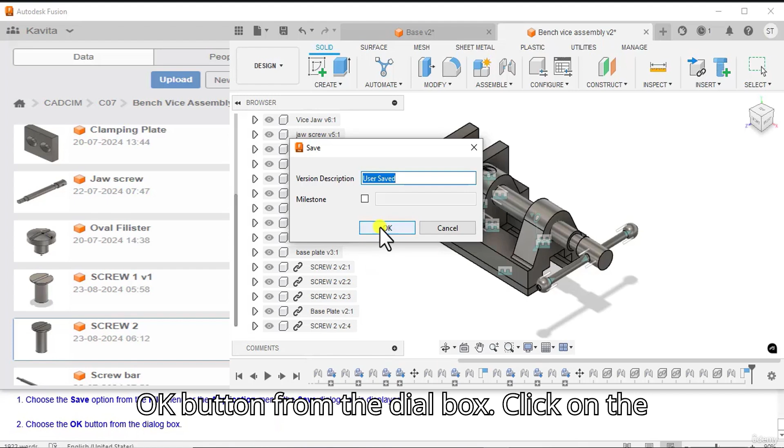Now your assembly gets saved in the data panel.